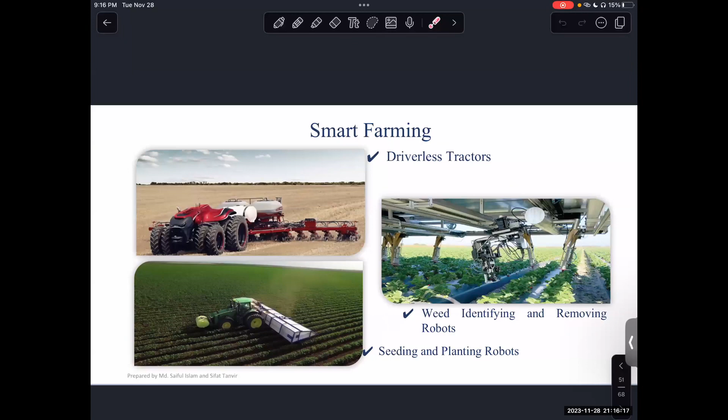So drones really help with many sensors and many devices. With this kind of farming, like driverless tractors—we have tractors, but farmers can hardly afford those kinds of tractors. So if those could be driverless and could plow or monitor the whole farm, it could reduce fatigue for a farmer.

There are more important things, like we can grow plants indoors. How does it work? We can use artificial lights—this kind of RGB light can help grow the plant. So we don't need sunlight directly; we can create the sunlight or the amount of UV it needs, and produce it indoors as well. This is fully automated and human labor is not needed.

It provides the best condition to grow any plants artificially. This is the future of computer science and agriculture. We can use drones, artificial lights, and machine vision techniques to monitor farming and all.

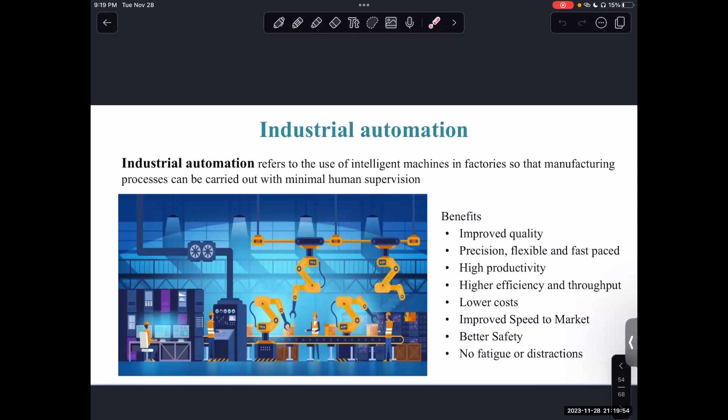If we talk about the automation system in industry, it's very interesting because there are many industries in Bangladesh using these automation systems to have many productions at one go. The benefits of industrial automation are that it improves the quality, and humans cannot work 24/7, but automated systems can, producing many products at lower cost. So yes, people get laid off, but if you think about precision, flexibility, fast pace, and high productivity, we always go for automation, which also improves the speed to market so we can earn more money through this efficiency.

Let's talk about the types of industrial automation. There are a few types. The first one is fixed automation. From the name, you already know it's specialized for only one product style.

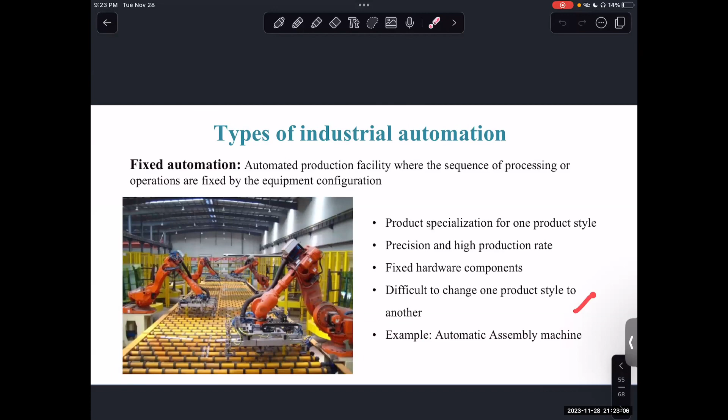Suppose you want to produce Pepsi cans. Pepsi has just one style—the can design, specifications, size, and length are all the same, one product style. With fixed automation, this can produce many products at one go. It automatically assembles the machines and does the rest. For huge numbers of production, this is a very good automation system. But it is difficult to change from one product style to another because it can only do one kind of style, so there are other types of industrial automation to change this.

This is called programmable automation. It means you can change the style with some additional programming. Suppose in the same Pepsi can, I want something different for certain seasons, like the Barbie theme—I wanted a pink color Pepsi can at that time. So we can program that theme for a certain period and change the style of the product. It's still fixed automation, but we can program it for style changes. The production rate will of course be less than fixed automation, because fixed automation doesn't need to reprogram for another style.

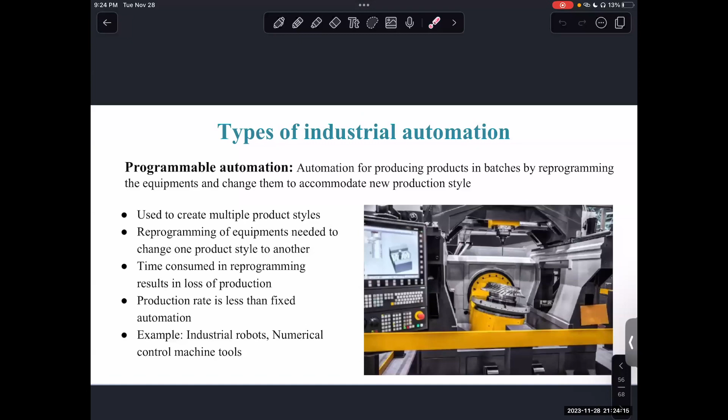There are many examples of robots that can do this automatically for industry. Another type is flexible automation, an extension of the programmable automation process. If we have a variety of products we need to produce, this can be the one used, with a higher production rate than programmable automation since it's more advanced.

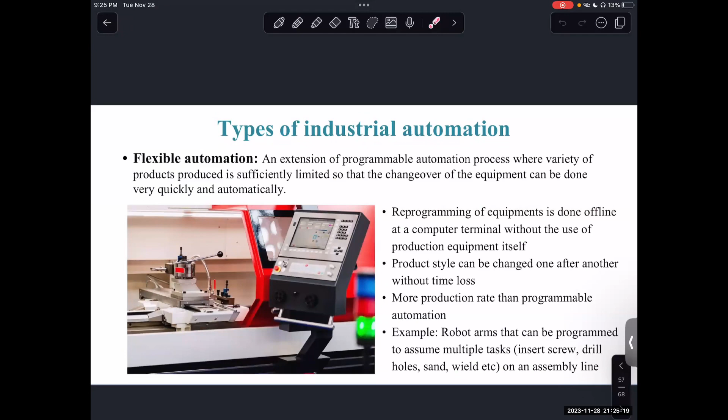It can change the style from one to another without time loss because it can do multiple tasks. Robot arms are one example, and they can be programmed to assume multiple tasks—like inserting screws, drilling holes, and plugging in other accessories together for the assembly line. This kind of robotic arm can work with flexible automation, so one thing can do multiple tasks.

Integrated automation includes the total manufacturing system. It's not just doing one task or changing the style—it does everything from start to end, fully automated, so no manpower is needed at all. This process can finish one product from start to end. For example, pharmaceutical companies use this kind of robotic arm, which can produce many products at one go.

So why do we use this kind of automation or robots? For lesser space utilization—just imagine if you have many people working in the same place, you need a huge space. But if we have just one arm, one desk is enough to do multiple tasks. There's no labor turnover, and we can have better waste management systems, lower operating costs, and all this increases productivity so much that you can produce many products with the automated system.

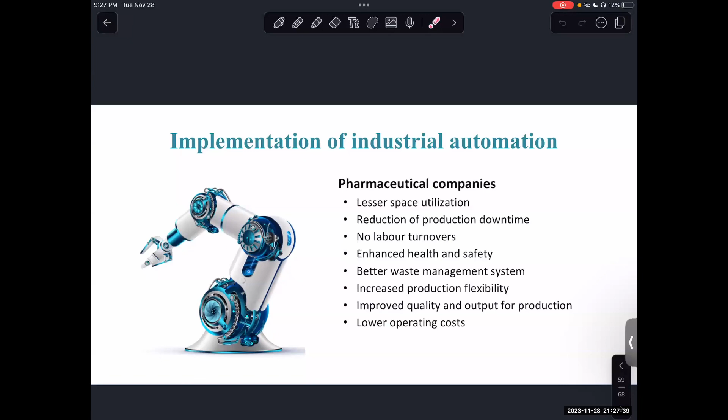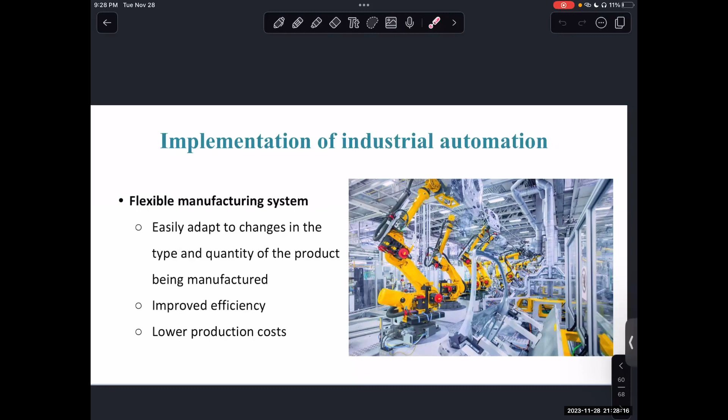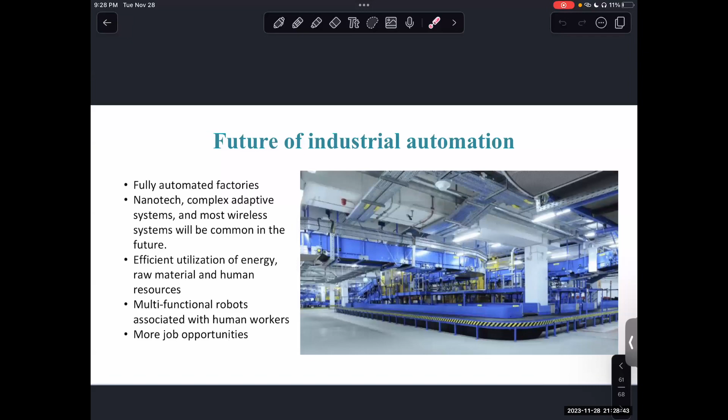We can also talk about financial technology, called in short fintech. This is all about retail banking, investment management, everything included in financial technology.

One of these is a hype called cryptocurrency, a technology people are using to earn money. This is called a digital or virtual currency, so it doesn't have a currency name like taka, dollar, or rupees. It can be converted to any currency whenever you want to take out cash, so it's called a digital currency.

One example is bitcoin, which you've already heard about. It is outside government control and central authorities, so you don't need to pay tax or answer to the government for these things. The algorithms used to safeguard your currency are encrypted, and it's not limited to a single country; it can be used across many countries.